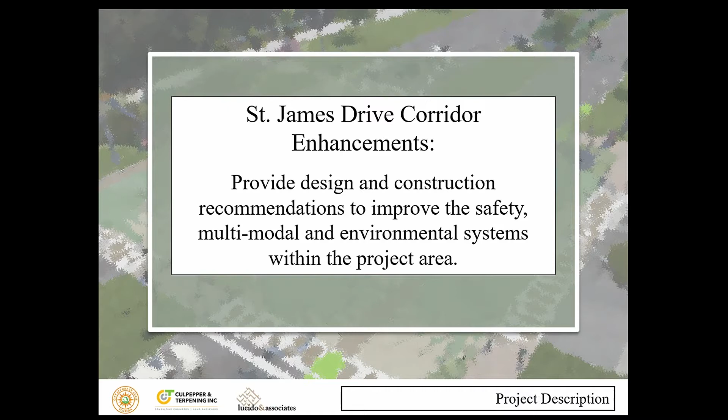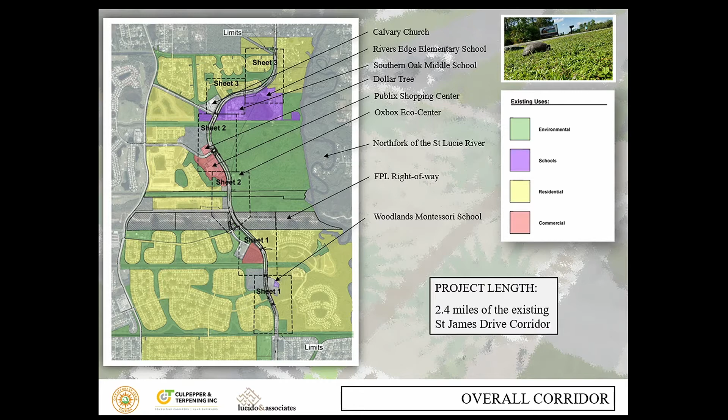So we're at a point where I'm going to read the first question, and this is interactive, so I challenge everybody to respond. What is your affiliation with St. James Drive? Your responses are: number one, a resident within the St. Lucie North neighborhood, the immediate area.

So if you live in a residential area and use St. James Drive as your primary way to get to and from that neighborhood, that's the appropriate response. Two, if you're a city resident but not specifically in the St. James corridor, but you happen to use it, travel it, or are just a concerned resident within the city. And three, if you're a business owner within this area or corridor.

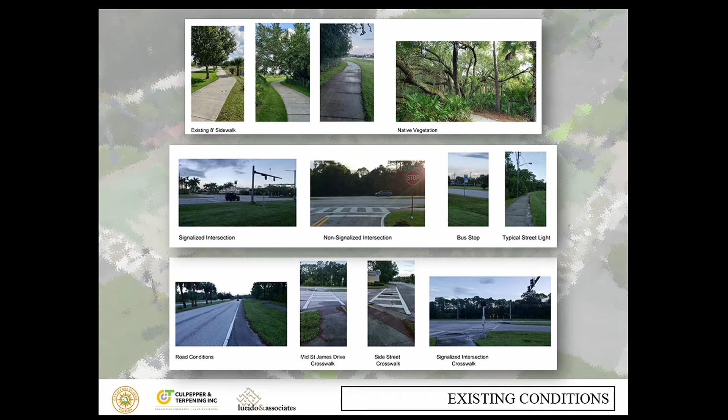The lower left image shows existing road conditions, essentially two travel lanes and somewhat of a shoulder. Our drainage pattern is predominantly a swaled system within this road corridor. You'll also see the existing crosswalks or road intersection conditions, whether it's a mid-St. James Drive crosswalk, a side street, or a signalized crosswalk or intersection. So that's kind of the lay of the land within this corridor.

You're not getting off that easy. Another question. We're going to try and keep everybody engaged tonight. And this is homework tonight.

So what is your main concern with St. James Drive? The options are: number one, safety. By safety, we mean speed of vehicles, pedestrian crossings, school crossings, that sort of thing. So anything correlated to safety within that experience, select number one. If your main concern is multimodal opportunities, such as sidewalks, additional sidewalks, bike paths, or a lack thereof, any additional existing or proposed connection methods to get through this corridor other than a vehicle, select number two. And third, option number three would be aesthetics, so landscape and the overall experience of the roadway.

We'll take a moment, let everyone digest that. For the participants, just to go back a bit, these are the three main categories we're tasked with within this corridor: safety, multimodal opportunities, and aesthetics or environmental. Those intertwine a bit, so if you hear us refer to aesthetics and environmental, it's the same category.

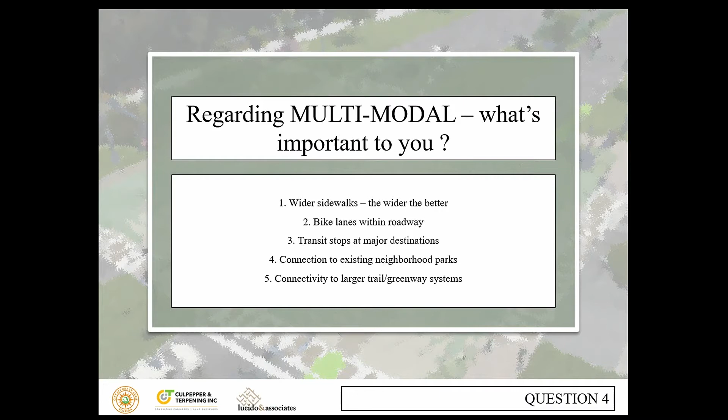So overwhelmingly, connectivity seems to be the response—connectivity to the larger systems and opportunities that exist within the city and the county, especially in this area, and then connection to the existing neighborhood parks. That's great feedback. And obviously that connectivity needs to be done in an appropriate fashion, with sidewalks and systems that are hopefully as wide as they can be. Thank you very much.

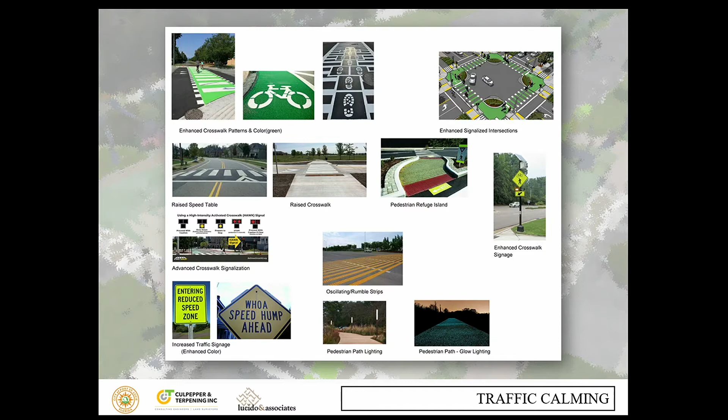We do have a median, which we'll explore more in depth this evening—providing an opportunity of refuge in the median when crossing a large right-of-way such as St. James, which is about 150 to 170 feet in width. And obviously enhanced crosswalk signage in general, as well as rumble strips, pedestrian lighting, and pedestrian path lighting—all elements within this toolkit we can utilize within this corridor.

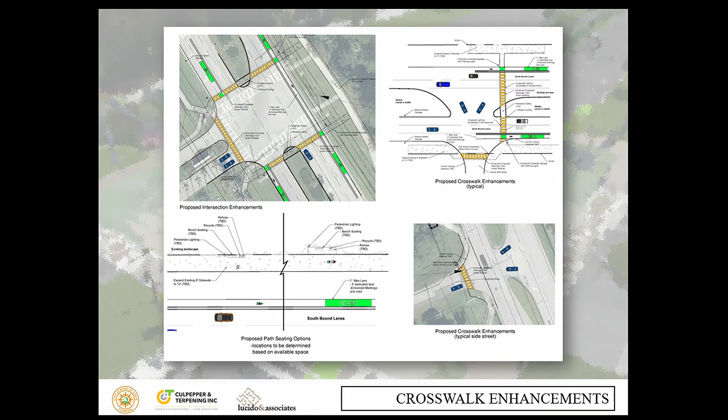I won't spend a ton of time on this—we can come back to it—but you'll see the crosswalks heightened, color used within the bike lanes to create more visual awareness, and these techniques employed on our existing roadway in this area. You'll even see in the medians that area of refuge where you can stop and then traverse as you cross.

This image puts all those elements from the toolkit in play at a typical intersection—this would be a signalized intersection. You'll see the crosswalks identified vibrantly in yellow, the bike lanes in green, areas of refuge, and landscape used to narrow in and create a tighter roadway experience for vehicles, thus slowing them down.

One thing to note, which we'll go through later, is that the proposed corridor depicted here has 11-foot travel lanes and 7-foot bike lanes on either side, all proposed within the existing roadway. So we're not expanding or adding asphalt to the corridor—we're working within the asphalt and pavement that exists out there today.

If you have a keen eye, you'll notice the median—when we get into landscape we'll touch on the bioswale and the use of the median functionally and aesthetically, but it's also curbed. One of our main objectives was to provide curbing along the majority of that median. There may be areas where it isn't possible, but for the most part we'd be curbing that median element and ensuring the drainage is appropriate and functional.

I'm going to pause for a second and ask Steph and Paul for their input if I missed anything. Avi, if you go back to the image real quick, I missed one thing that was important.

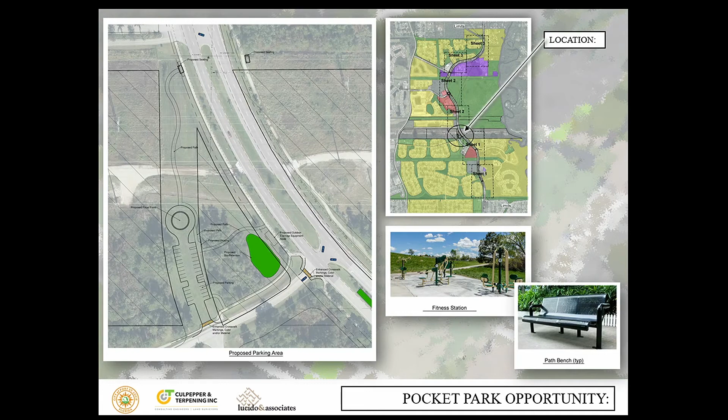Anything on that I should add? Okay, so moving on, question number 7: Would you walk or bike more often if some of the proposed improvements were made? This is an easy one. 1 is yes, 2 is no, 3 is maybe.

Would you walk or bike more often if proposed improvements were made? So all of you guys who responded seldom, give me a yes, a no, or a maybe.

And we're going to close this out. Overwhelming yes, 86% yes, and the remaining 14% were maybe. So no no's — that's a good sign. I like it.

Moving on, we've covered, somewhat briefly, safety and multimodal. The third element we're tasked with understanding and providing recommendations on is the landscape, environmental, and water quality component, which is stormwater. Going back again from a landscape and environmental standpoint, what does this corridor consist of?

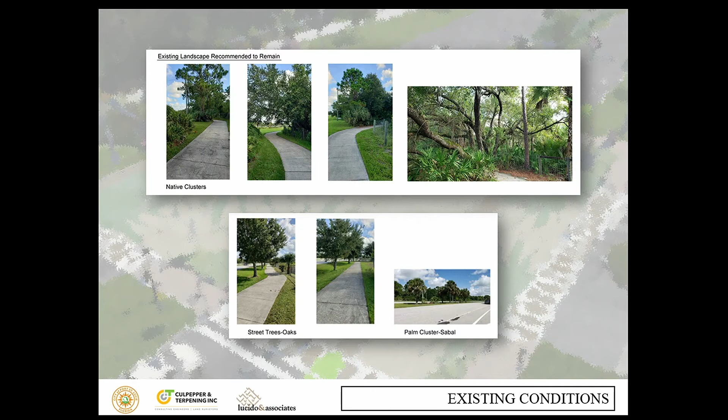Overwhelmingly, I'd say native clusters. We've got great opportunities with Oxbow and that frontage for these existing clusters. We have a fair amount of street trees, predominantly oaks, and the palms we have are predominantly sabals in clusters. So we have some good bones and structure already existing to build from.

We also have some areas that aren't as desirable or consistent with making this corridor feel cohesive and pulled together, stating the same sense of experience — which I think this corridor really has the opportunity to do for the city. Some elements we've been studying for removal or working within the overall design include pockets of understory and crape myrtles, some isolated trees such as golden rain trees in areas, and some miscellaneous random plantings. It's those areas we really want to take a hard look at to see how we can pull this corridor together from a landscape and aesthetic standpoint.

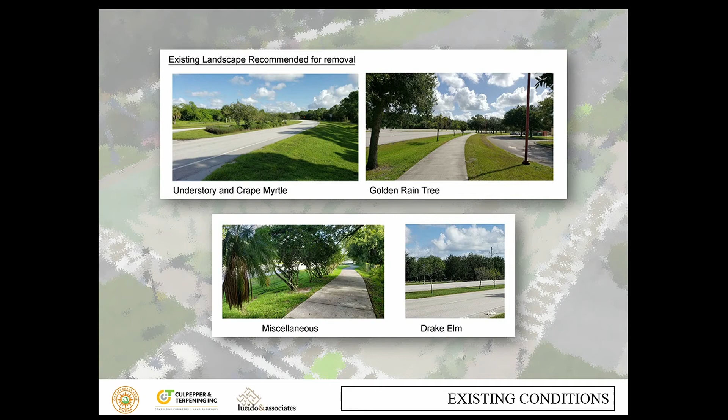We have another challenge as well: the eastern side with Oxbow is more native, natural, with heavier, more mature existing vegetation, whereas the west side, especially with commercial development, has more of a commercial type of development and aesthetic in the landscape.

Going back to the median — the corridor is blessed with this median. I think it helps create a lot of the aesthetic and experience of the corridor. It's not just travel lanes; it's a fairly large, wide median. We want to put it to use and put it to work, essentially. So the main element and way of doing that is to create a bioswale in it. It won't be throughout — it'll be in defined areas.

A bioswale is basically the use of plants and natural materials to treat the water. So the stormwater flows off the road and into this swale, and before it percolates and goes through the system — ultimately conveyed to our rivers in the North Fork of the St. Lucie River — it's treated. These plants help cleanse and treat that water before it percolates or flows elsewhere.

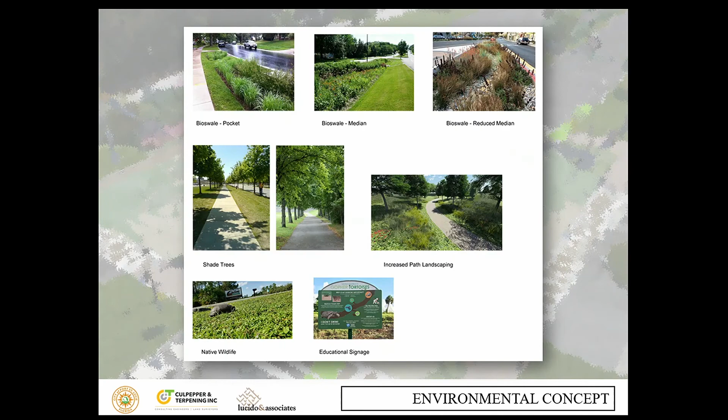With that, a plan view and a cross-section of what Mr. Gillis just stated: bioswales in pockets with street trees. Right in the middle is that median. Left to right, you can see street trees and plantings in the bioswale in the middle. And in the lower left of the plan view image, we're intending that thematically the plants and palette used would also be expressed on both the east and west sides of the road corridor where possible, within FDOT and city guidelines.

One thing to mention, this project is a true partnership between the city of Port St. Lucie and St. Lucie County, and all the documents being prepared through this process are being reviewed through a process both with the city and the county in that partnership.

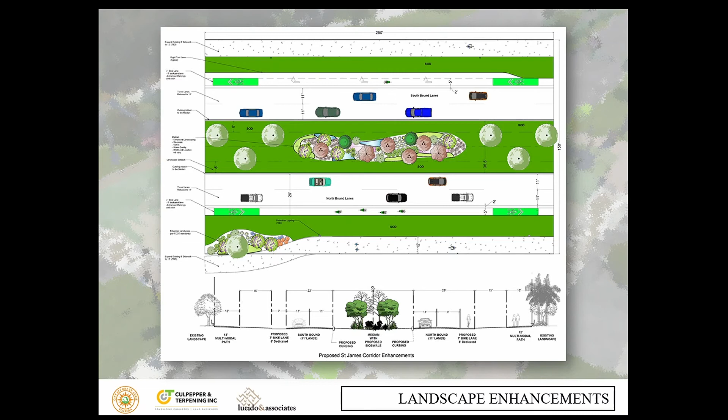I'm going to go back. So plan view, bioswale, street trees. Below this, you'll see a typical cross-section of St. James with the elements there. I'm going to walk through it because there's a lot of symmetry. On either side, within that right-of-way, you'll see the 12-foot multimodal path, the landscape area, the proposed 7-foot bike lanes, 11-foot travel lanes on either side, and then the median in the middle. This is a cross-section through what would be the proposed bioswale area.

The St. James corridor is predominantly 150 feet in width, but we do have areas where it expands to about 175 feet. Those are the areas where we have more opportunity to leverage the east or west sides of the road to have additional pockets of landscape and to enhance or plant new landscape around those pedestrian walkways and multimodal systems, helping insulate them from the travel and traffic lanes.